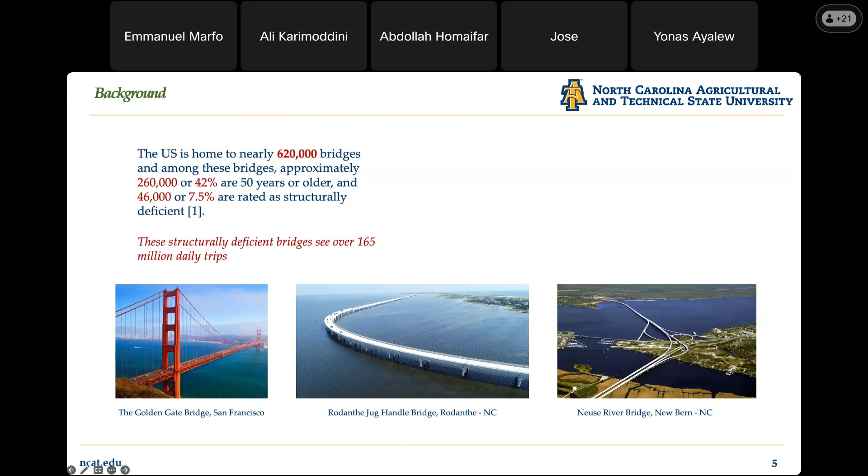So about the background, a little bit of history about bridges in the US. Currently, as per the ARTBA data, the US houses almost 620,000 bridges. And these bridges, some are very old, mostly dating back 70 or 80 years. As known, bridges, since they are all structural elements or structural systems, require consistent and recurrent inspections and rehabilitation.

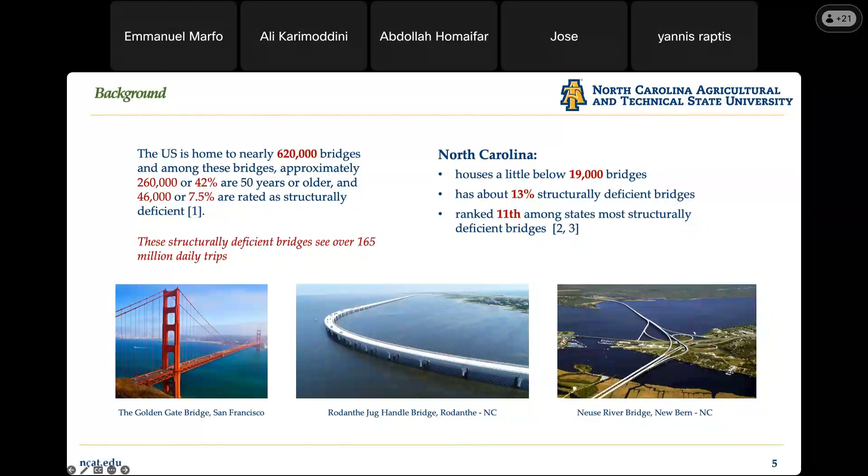To narrow down to North Carolina, the state houses almost 19,000 bridges. In these particular numbers, there is a structural rating which is mostly assigned by the National Bridge Authority and the Federal Highway Administration. North Carolina has 13% of these bridges as defective, which is way above the national threshold for defective bridges in a particular state. As such, they need to consistently conduct inspection, and bridge repairs are always on the rise.

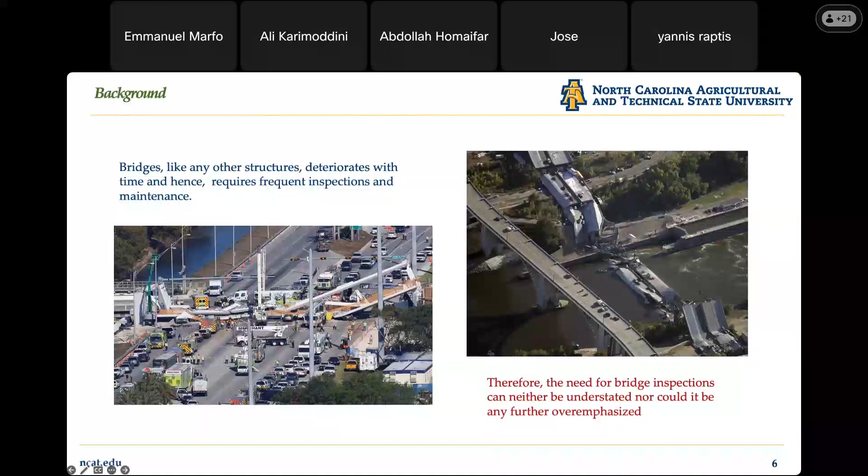As such, bridge inspections are very important in the US, and the Federal Highway Administration has defined a number of inspection approaches or sequences that need to be done. With regards to inspection types, there are generally 7 inspection categories defined by the Federal Highway Administration. Based on the structural makeup, its complexity, the traffic on it, and its location, a particular inspection approach or pattern may be chosen.

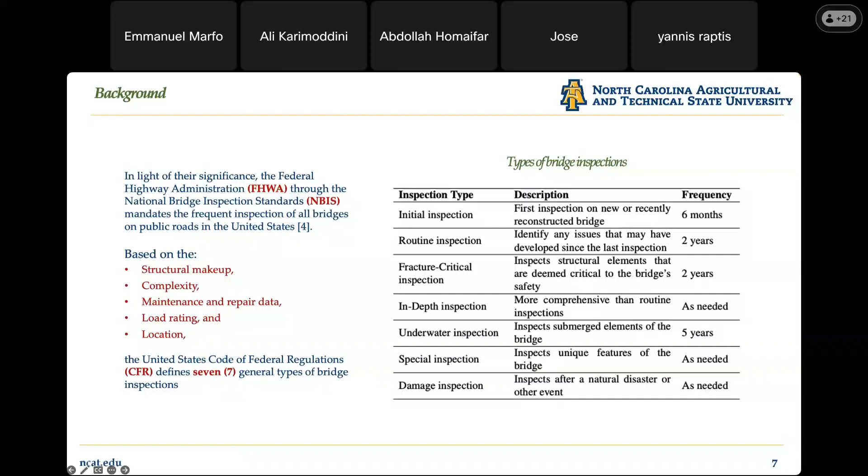In all these inspection activities, the traditional approach has downsides. To mention a few, it's proven over time to be very costly and very time consuming. Looking at the highway estimation for the biannual expenditure on bridge inspection, it's almost $2.7 billion, which is high looking at the budget set.

Aside the cost and time challenge, there's also safety risk that is constantly increasing with regards to bridge complexity increasing. Now bridges are more complex, and as such their height, weight, and load ratings are also high. Assessing the individual and distinct components exposes inspectors to several risks and hazards, such as working at height, or using trucks which are not stable on bridges with low load ratings, leading to collapse during inspections. Also, since inspections are not streamlined, it always leads to subjectivity and variability in the results, depending on each person and how he or she sees the results being populated.

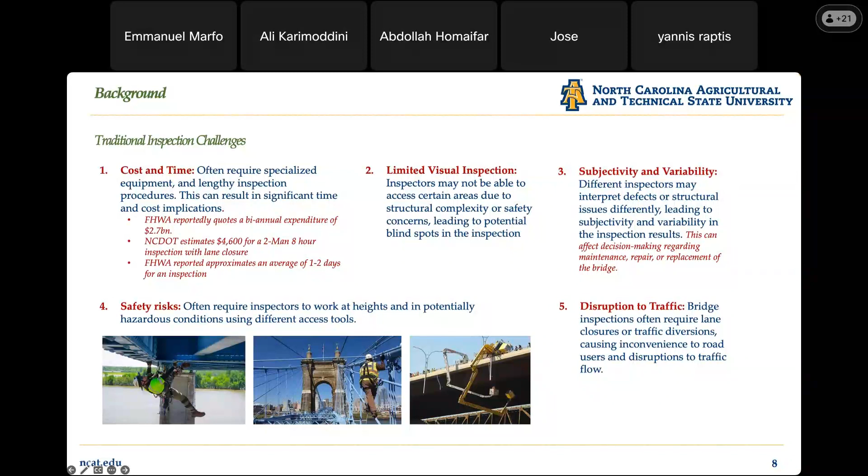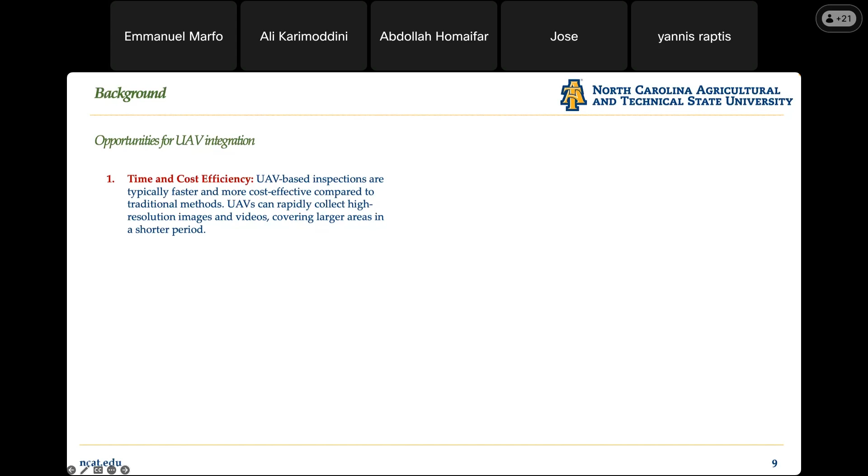As such, the need to define an inspection system which will solve these problems increased. There's been research on how to take advantage of emerging technologies like UAVs and other remote sensing technologies to help solve these problems. So in this work, using UAVs, we hope to reduce the time and cost challenge or make them more efficient by integrating UAVs.

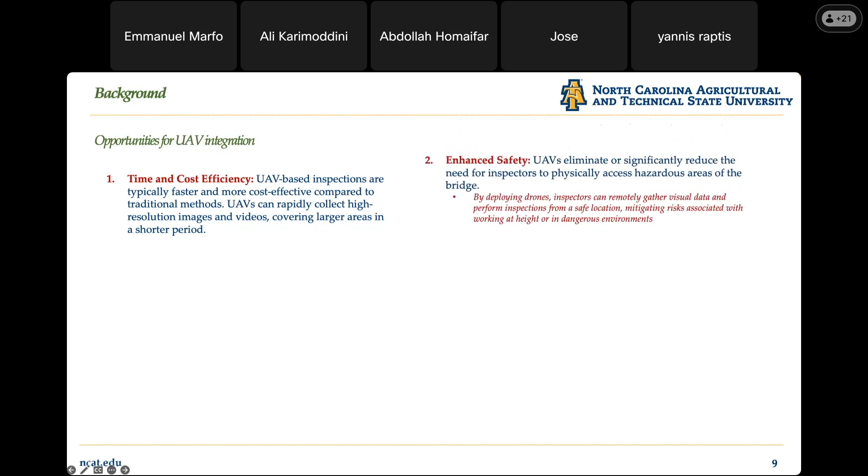Also, we hope to enhance the security and safety, that is, reduce the level at which inspectors work at height or work in confined spaces.

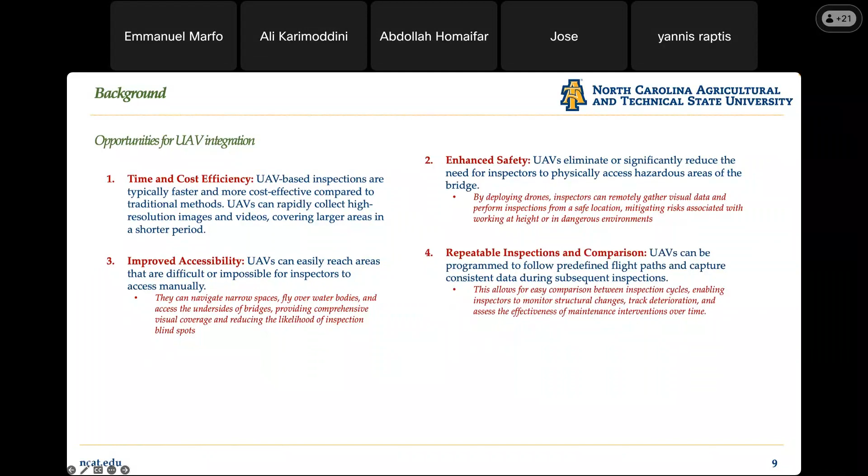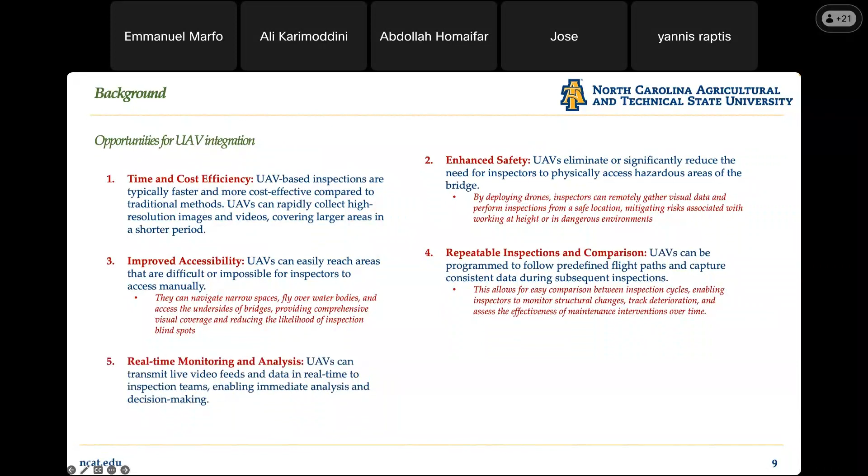By using UAVs, we are also hoping to increase accessibility to some distinct aspects of the bridges. We have to create an ecosystem where we can repeatedly achieve the same results, even if done by different people with different inspection skills and knowledge. We also need to make it faster, so we need an enhanced real-time system that can monitor, analyze, and report findings to bridge stakeholders and owners.

Jumping to the focus, to solve these issues we need to hit on some particular points. The first is the restrictions imposed on UAV integration and usage by the FAA, the commonest being airspace class. There are class distinctions for which UAVs may or may not fly in the US, so it's prudent the inspection team and researchers go over the restrictions and apply for waivers if possible to conduct an experiment.

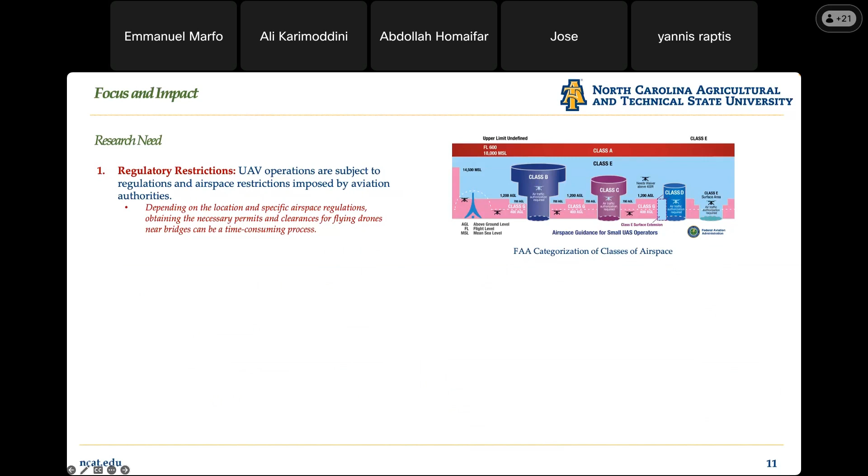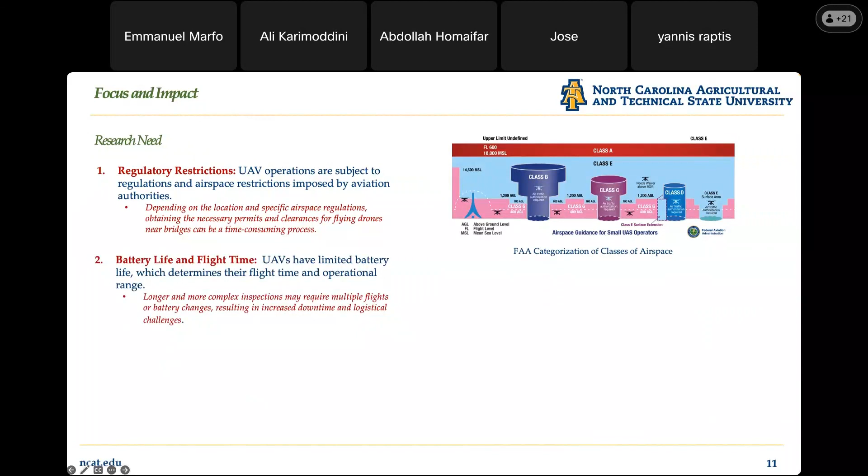Also, there's a need to analyze battery life and flight time. UAVs have limited batteries, so we need to understand the integration process, what it comes with, and what to make available to avoid failure or drawbacks. We also need a system to help interpret the data we collect, whether in real time or post-inspection, to reduce variability and different validations based on different knowledge and skills from different personnel.

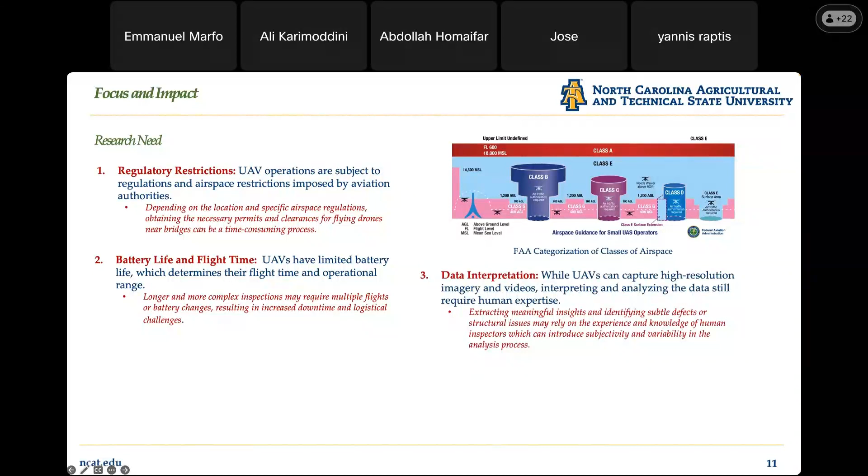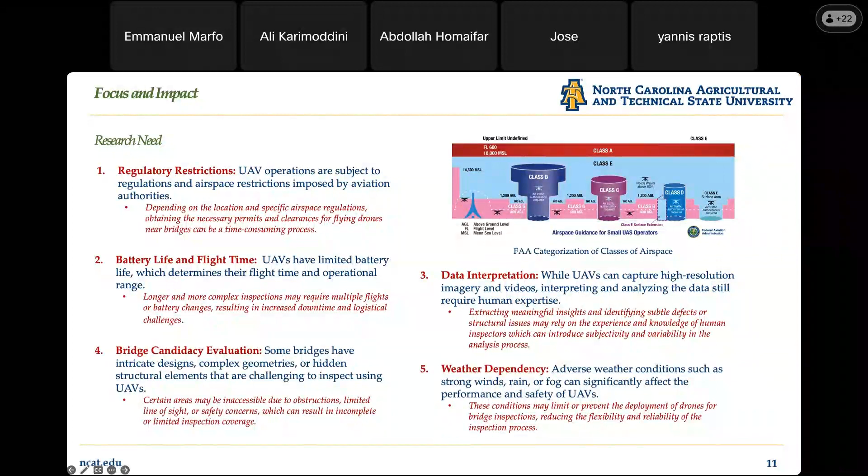Since not all bridges may qualify for UAV integration, we need to develop a system that will help us evaluate a particular bridge to see if it fits for UAV integration, and a system that will help detect ahead of time if the weather schedule is appropriate.

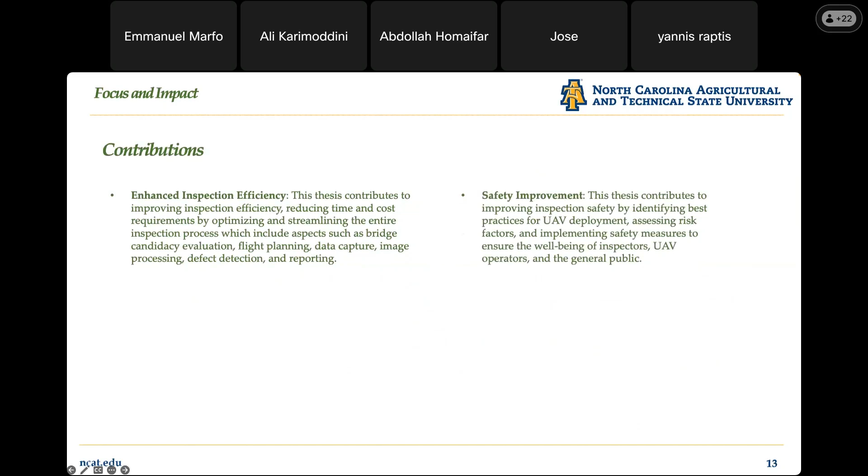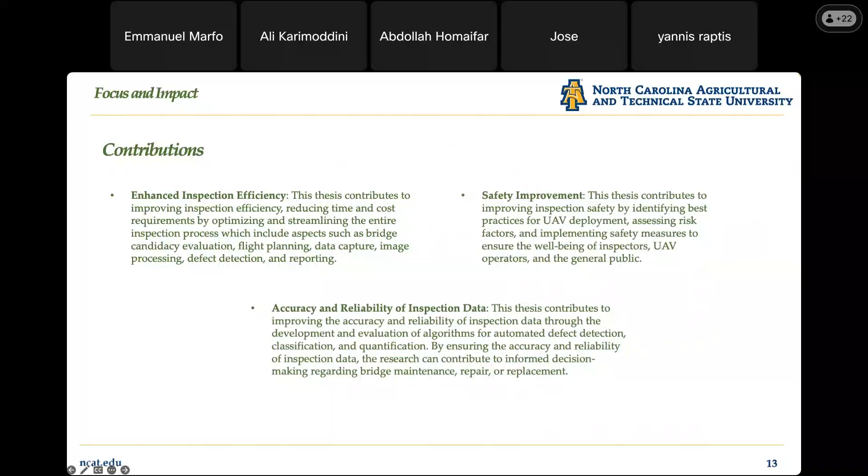In the end, we hope to achieve three main goals: enhance inspection efficiency, cost and time; improve the safety aspect by reducing risk and increasing accessibility; and make our results more reliable and more repeatable.

So in our work, in accordance with the current inspection process, bridge inspections are categorized into three main stages: the pre-inspection, which houses in-office activities and on-site evaluations; the actual field activities involving data collection and analysis, with real-time implementation if in place; and the post-inspection phase, involving detailed data analytics, report generation, and stakeholder meetings.

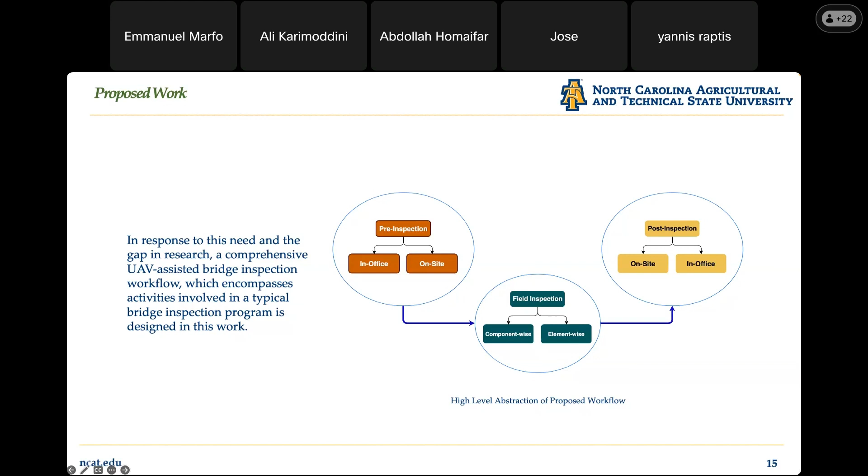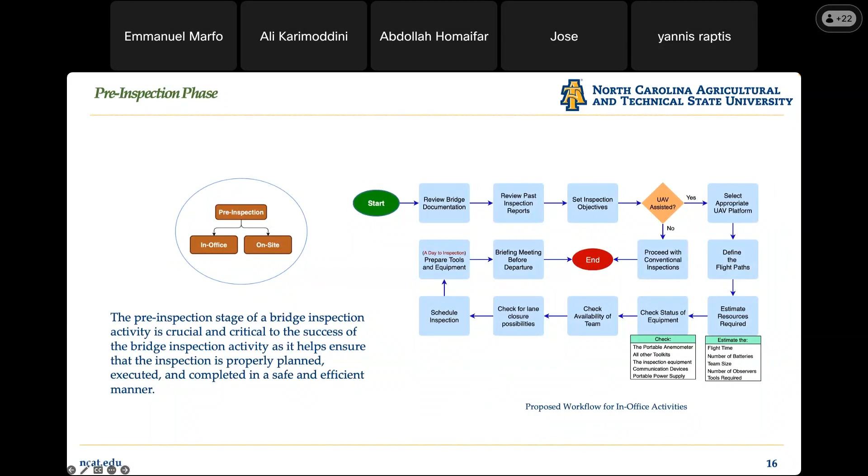To start with the inspection process in the office, we try to go by the traditional approach, not to introduce a huge difference in practice from the get-go. This workflow is in line with traditional practice: first, the stakeholders or inspection team evaluate the documentation, getting to know the bridge history regarding maintenance data and what needs to be done or has been done earlier. Then in the next stage, we kickstart the UAV integration.

At this point we do the bridge candidacy evaluation, to see if the bridge fits for UAV inspection. We shortlisted key metrics to focus on, particularly the bridge size, height, or complexity, since some bridges are short enough to not warrant UAV integration, along with accessibility, location, cost effectiveness, and looking at the previous inspection report for how much was spent and how much time was spent.

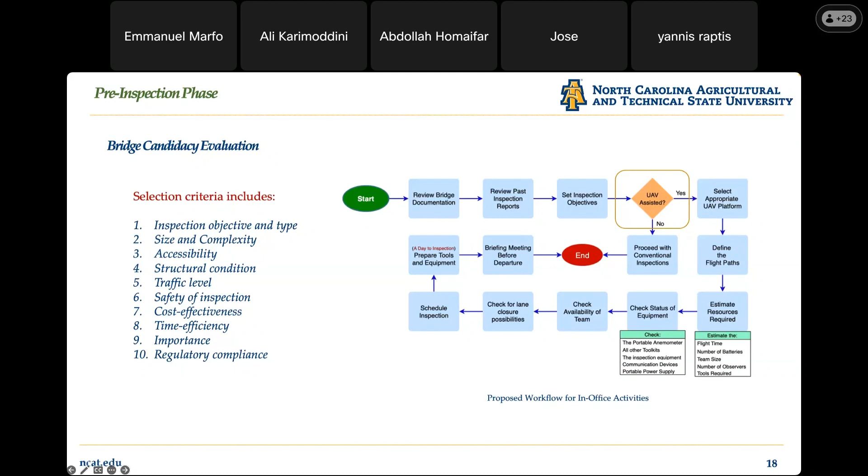If all these criteria are assigned higher scores, the final score from the candidacy evaluation table will inform stakeholders on the approach, either UAV integration or the traditional approach which has always been the practice. In the end, this table will be designed in a UI form integrable into the current system used by NCDOT, called Wiggins, so that in real time they can do this analysis together with office planning to know what to go by during the actual inspection phase.

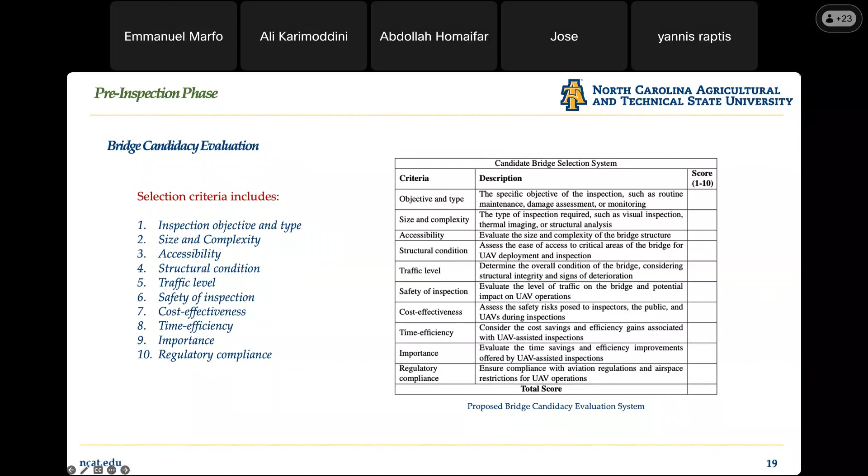After being able to evaluate the bridge candidacy, we can now proceed to selecting the platform. Knowing the bridge we are working on and the objectives for the inspection will best advise on the platform to use, so this stage will be dealt with as a result of what is obtained in the previous phase.

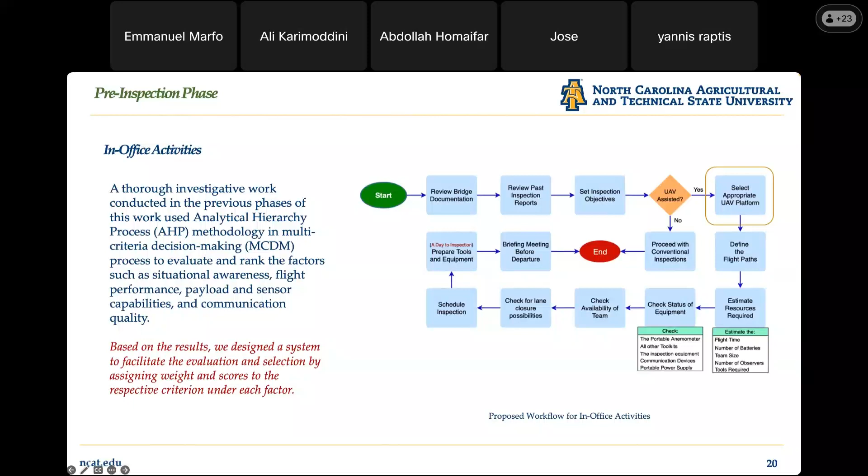In the previous phase of the research, the team developed a template that will be used to evaluate several platforms to understand which one to use for a particular bridge inspection activity.

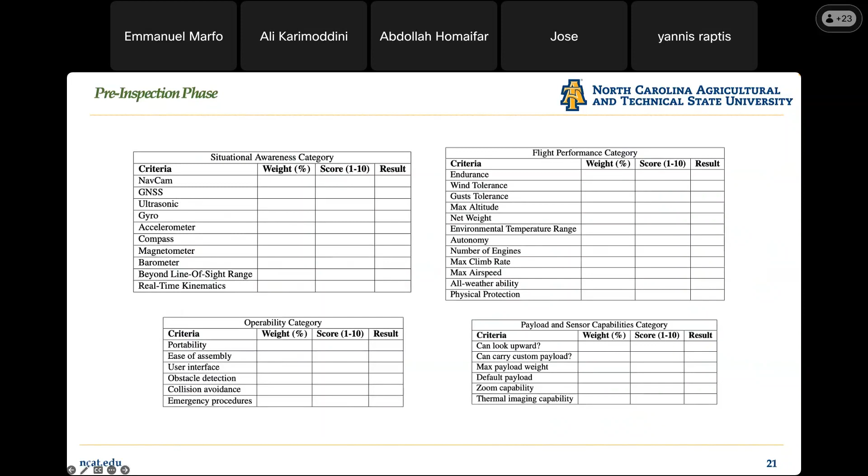After selecting the bridge and the particular platform to use for the inspection, it's now time for us to plan the inspection properly.

In the planning phase, you have to understand the expected time the inspection will span, and the number of resources needed: the team, the batteries, and standby resources to make the inspection happen smoothly. In our work, we defined a flight path or flight sequence which, after conducting several experiments, we realized was best to use.

In that experiment, we defined 4 different flight paths. The first is the vertical: a top-to-down or down-to-top flight over the vertical elements in the bridge, particularly the piers, the columns, the bents, and the pillars, just to name a few.

After this, we defined a longitudinal flight, which in our definition travels along the x-axis for a regular 3D element, if you make the bridge a 3D element. In a typical bridge structure, this flies along the girders, the beams, or the rails, the actual railroad. That is the longitudinal section.

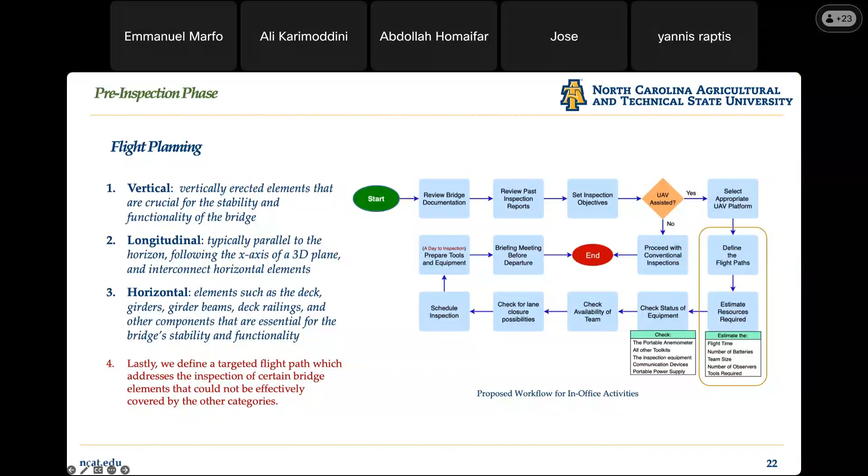After defining the preferred flight path for the inspection, it's wise to estimate the time used in this flight, or the total inspection approach. In our approach to estimating the time required, we first defined static paths for our bridge elements.

As said earlier, the pile or the bent, the columns, and the pillars are the vertical elements. The pier cap and the girder beams or grade beams are the horizontal elements, and longitudinal elements are the girders themselves or the deck road themselves.

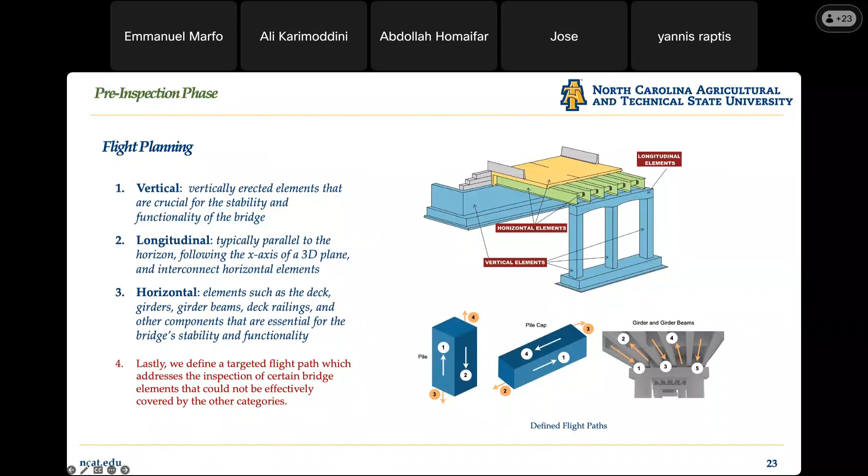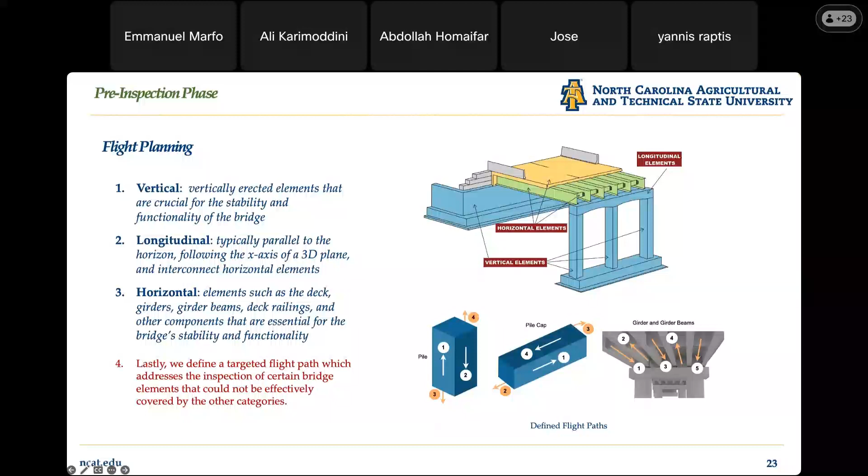After these definitions, we first did an experiment to understand the skill level of a pilot employed to fly the drones or conduct the inspection. In that experiment, we defined 3 flight categories: a basic pilot, a professional, and an intermediate pilot.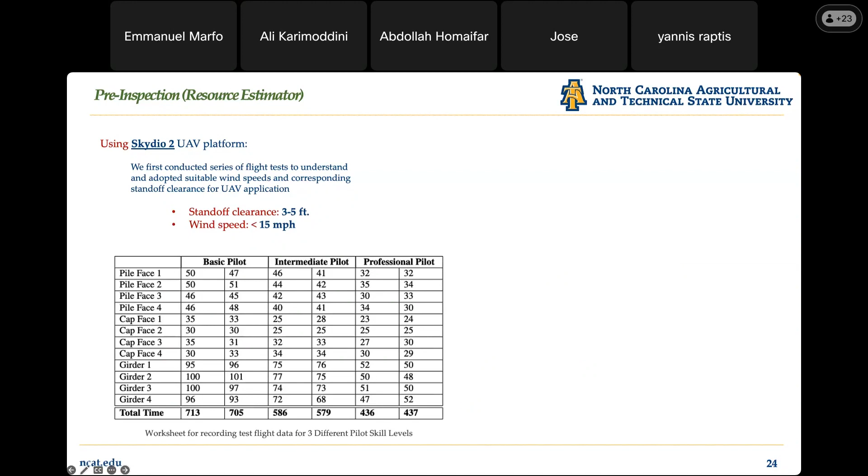We had a series of flight experiments with these separate pilots to understand the timing or time sequence they go through in successfully inspecting elements or the whole bridge. After these phases, we were able to calculate the required speed or speed ranges for which a particular pilot skill level can fly the drones and give us an optimal output for analysis.

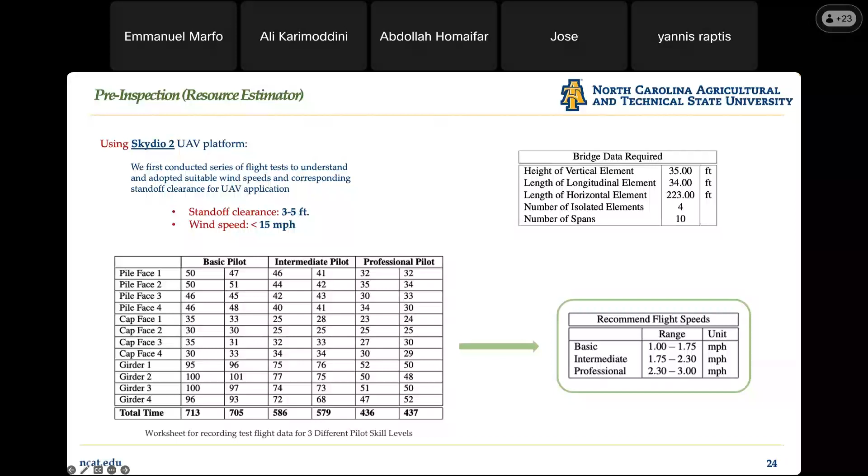As shown in the green box table, we're able to define the ranges for the pilot skill levels. Having defined these ranges, we now use one pilot skill level to estimate the time it will take to conduct a bridge inspection.

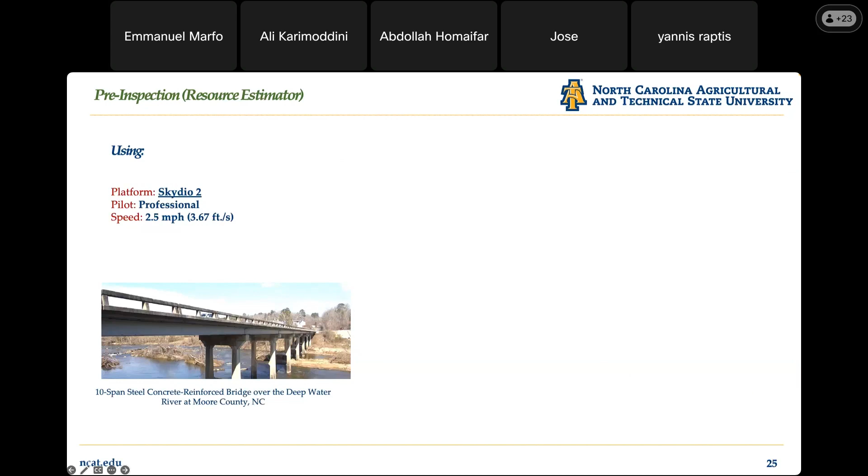Using this bridge, which has 10 spans and each span almost 66 foot long in regards to length, we're able to design a tool that estimates the inspection time.

As shown here, using this bridge and the dimensions given in the previous slide, with a pilot at the professional skill level and setting the speed to 2.5 mph, it was estimated that the pilot would take nearly 2.5 hours to conduct the full inspection.

This estimation includes a 30% margin of error, which can be attributed to differences in wind speed at that time, or weather causing several break and resume sequences in the inspection.

And having known the inspection time, we can quickly compute the resources we need with regards to batteries. Since each drone battery lasts, let's say, 30 or 25 minutes, the manufacturer stipulations there are with regards to room temperature. So in our estimation, we assume that 85% of the battery can be used.

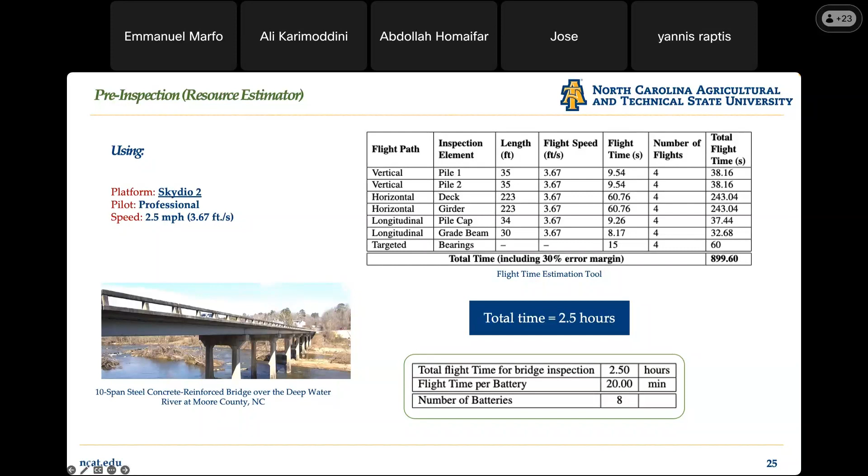So all these insights will be modeled in the general workflow that will be transferred from the research phase to the implementation phase for the inspection team to apply. After these estimations, we can now jump to preparing for the inspection, which is almost similar to what they do in their traditional sequence: gather all the items, make sure all team members are informed on the date and scheduling, and everything is gathered before the day of inspection.

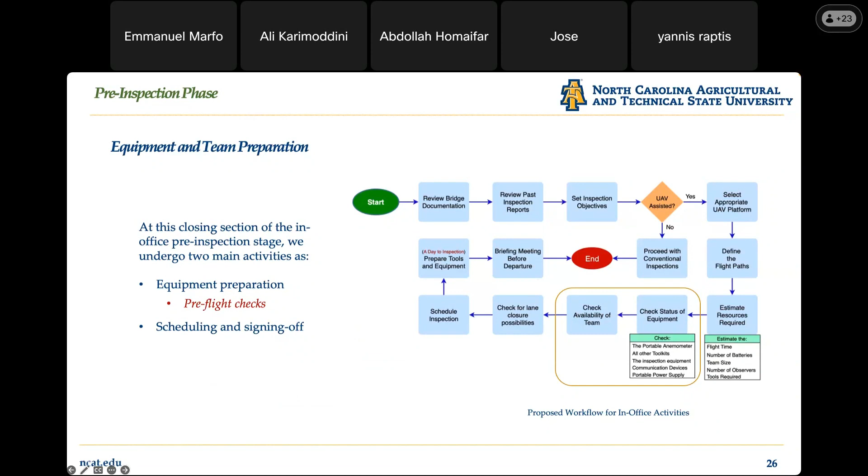And since we are transferring the technology from the research labs to the field, we have to make it easy for the inspectors to understand how to go about using these drones and frequently servicing and updating them. So we designed a simple flow which applies to almost all drones that we have in our lab.

This design was added because of some incidents we faced. There were happenings where the team got to the inspection site and realized the drone actually required an update. As such, we were not able to fly the drone. You have to drive back hours to the office just to update the drone.

Or you have to drive back to a site where there's internet. Most bridges are at remote places where there are no or weak internet signals, so you have to drive back to get a better signal to update it, which all adds up to the inspection time and literally to inspection cost. So we added this to ensure that the inspection team conducts all these activities to optimize their in-field inspection time.

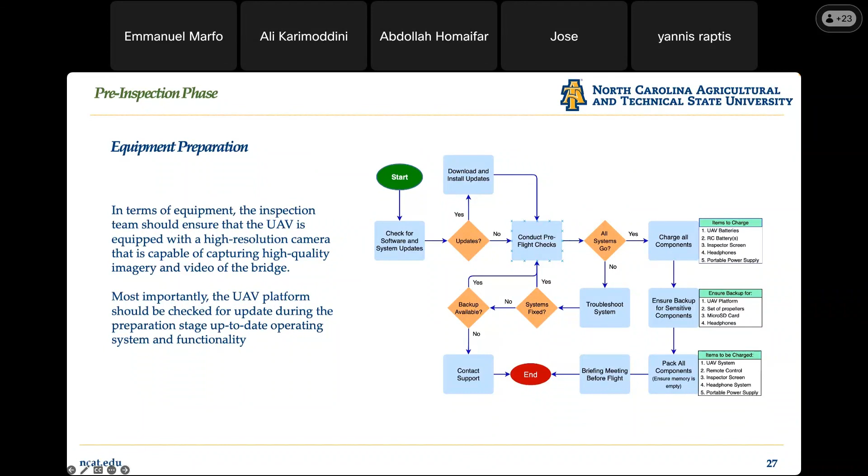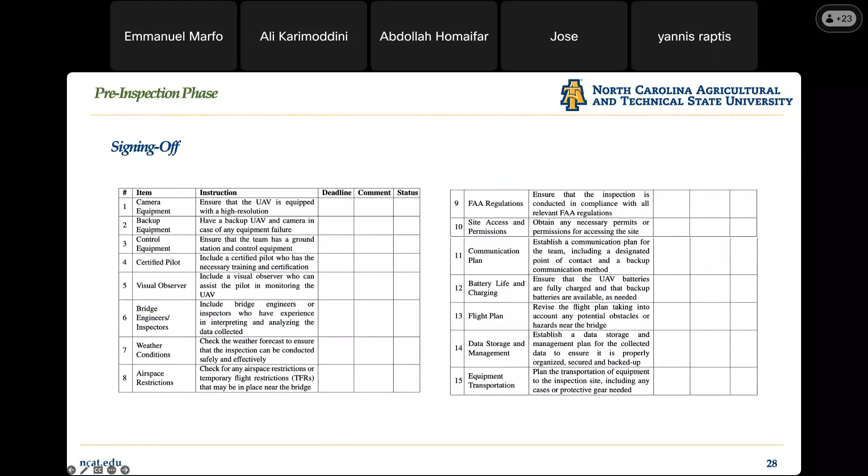And in the final stage, after the in-office activities, we just sign off by having this UI or software, which will let them check off whatever item is needed for the inspection to be done.

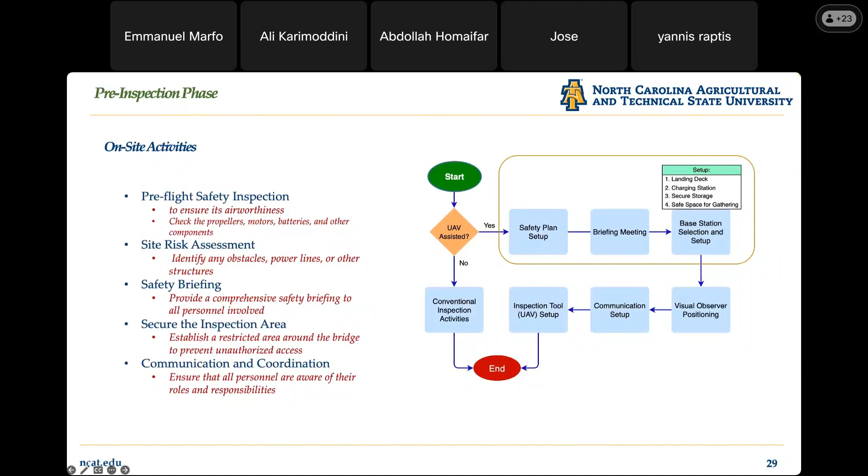At the site, there are some basic things to be done: check the safety plan, have a briefing with the team, and in the next stage, there is a mandate from the FAA which says that for any UAV outdoor inspection or flight, there's supposed to be a visual observer who at any point in time keeps eyes on the drone and communicates with the pilot as to incoming traffic or any danger ahead.

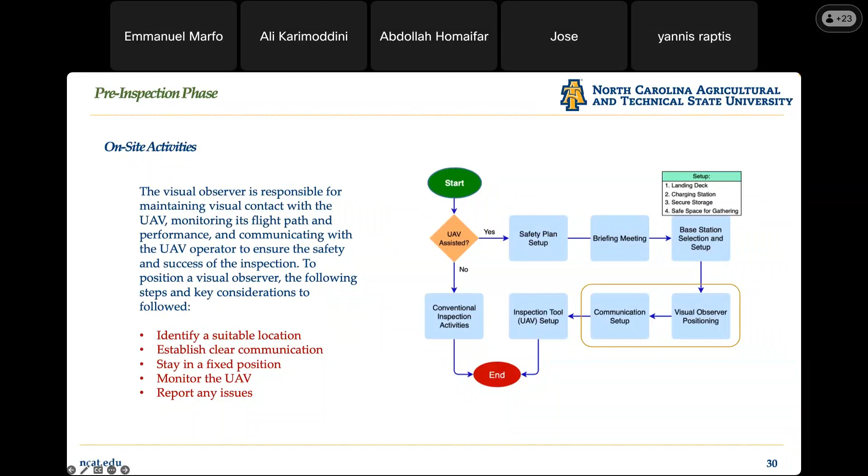So it is wise that the team set aside special people who will act as observers. And to optimize the team size, it is best the team decides that among the members, people multitask so as not to introduce any extra team member just for the job of observer. So all these are handled in the pre-inspection phase before the actual inspection is started.

And in the field inspection, currently in our work, we limited our resources to only RGB-based UAVs. There are several sensor technologies, thermal and among the rest, but we use only RGB cameras for this phase. And in using RGBs, we define 3 approaches to conducting the inspection.

The first can be collect overlapping images, which are basically videos, and then we can run the videos through an optimized or developed algorithm, which will help us analyze the respective displacements that are recorded in the video, or collect multiple images with a high overlap to avoid missing any damage or defects.

Then we can run an algorithm on it to draw contours or bounding boxes around the respective defects detected. And the third is to employ 3D reconstruction, where the bridge can be modeled as a digital twin, and then on a digital twin, you can now augment the respective defects on it.

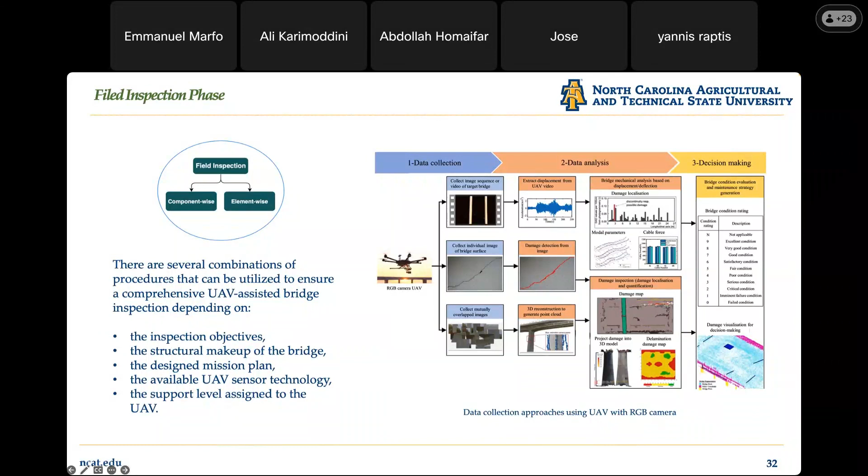Going by these workflows, this is applicable after we check all the systems and get to the 3D modeling part. We just pop up a question for the user or the pilot.

If we are not employing 3D reconstruction, we can jump straight to inspection. In the event that we are employing 3D reconstruction, we have to kickstart the 3D modeling phase, which will remodel the bridge. If the model is not already available, we have to build it by collecting overlapping images first.

But if there is already a 3D model built for the bridge, you can go straight to inspecting and then augmenting or filling in the respective defects with the current state of the bridge.

During the inspection process, if there is a real-time system established which can communicate defects in real time, be it with bounding box or contours, the system will be kickstarted. If not, we collect the necessary images or videos and save them for post-inspection activities.

In our work, to have a real-time system established, due to how heavy the deep neural network systems are, we sought to quantize or compress our models so they can be used on edge devices. There are several ways to do that.

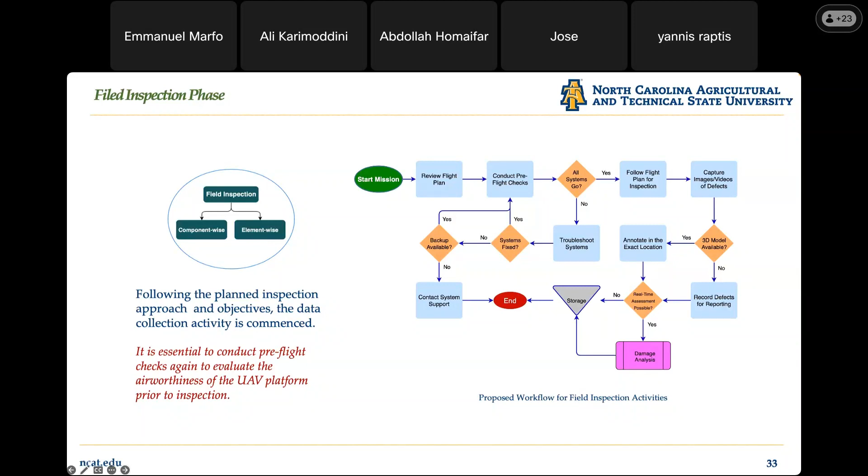But this is a UAV assisted inspection, it's not overtaking the entire inspection approach. So the inspector validates the output from the UAV before it is saved or assumed as valid.

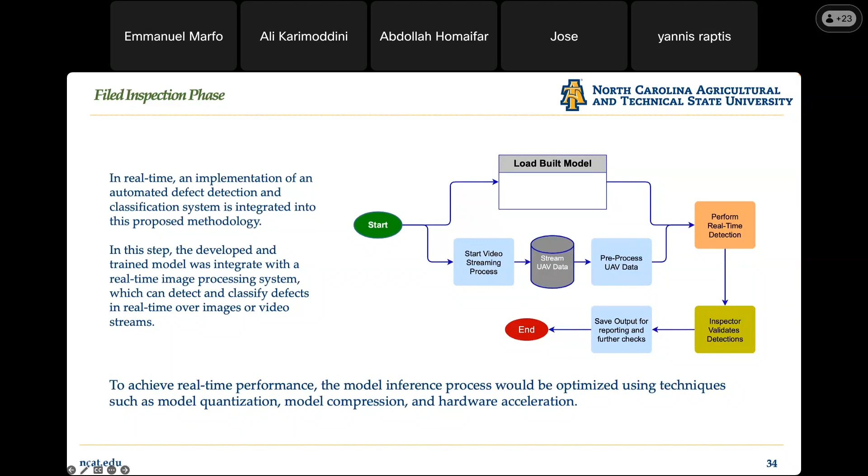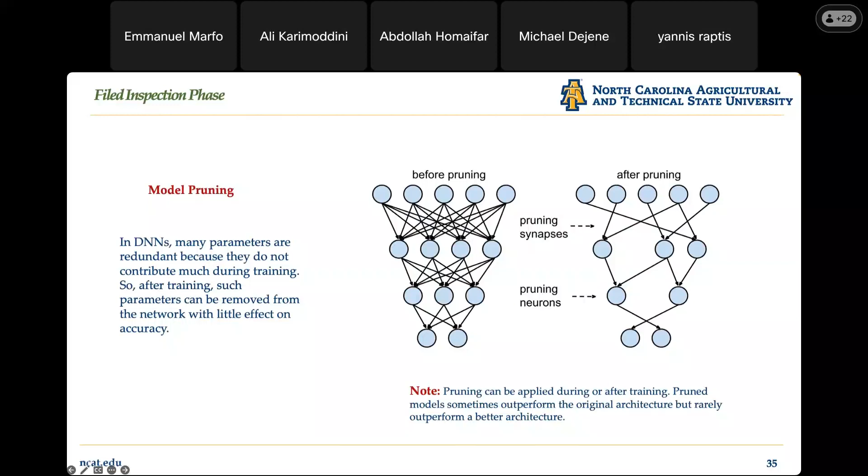To achieve the real-time effect, we try to use the model pruning approach. Pruning, as I mentioned, is just to reduce the number of connections and neurons in the entire system, to arrive at a compressed model with smaller size but equal performance as the parent model.

In the event that real-time inspection cannot be started, the data collected can be analyzed in the post-inspection phase. Also, after real-time inspection has been done, the data can still be analyzed intensively in the post-inspection phase.

In this phase, we design a simple workflow to guide it. Depending on the data type that was recorded, we pass it through the appropriate processing models or algorithms. For 3D reconstruction, we pass them through point cloud processing. For video and images, they go through visual analysis algorithms.

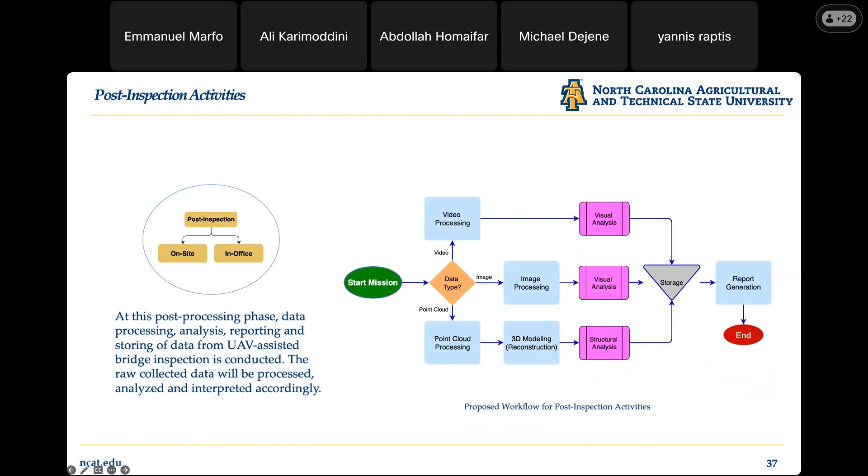In our data processing, we first use the respective image processing techniques to put our images in the best shape before they are passed to the algorithms, as has been the practice for computer vision and all these image processing techniques.

And afterwards, we do our analytics. As mentioned, this work was mostly focused on images and videos. We didn't consider point cloud that much, so the section for structural analysis is not dealt with in this phase.

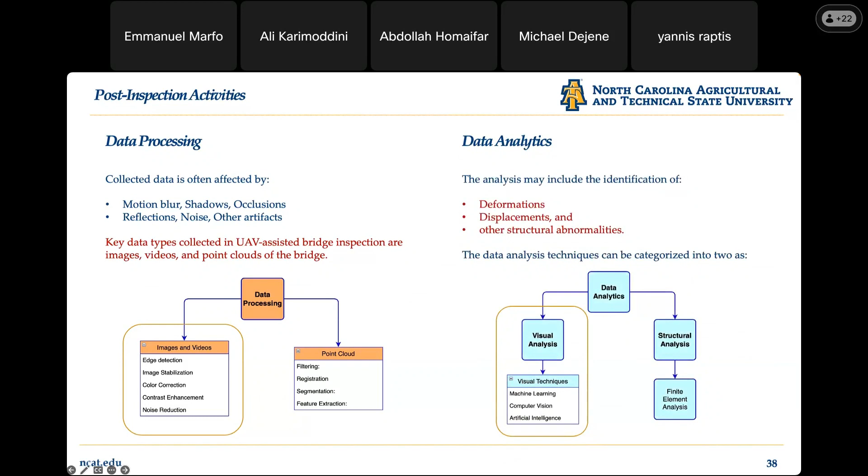In the visual inspection section, we use machine learning algorithms coupled with computer vision techniques and AI to achieve our output. In the first work, we considered an instance where the visible defects on the bridge are just cracks, only cracks. So in that, you have a set with cracks and no cracks.

This is the sequence in which the algorithm was developed for conducting the data analytics. We first pass the images through an image processing technique to filter or put it in the best shape. The algorithm will now detect and classify the cracks, and then you can quantify it if possible.

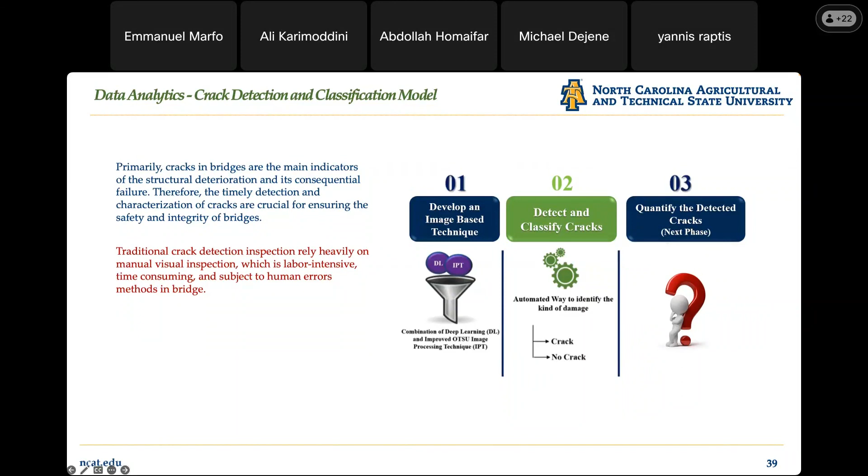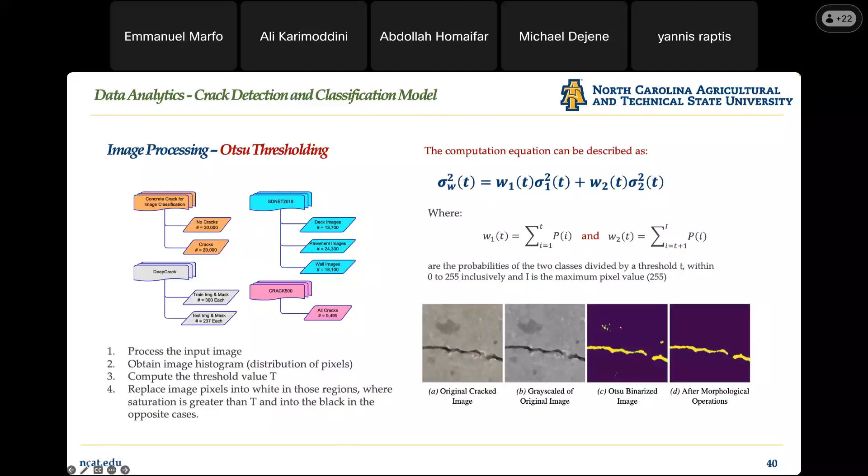So a sample of images that were used in model construction are shown. In the processing stage, we first use Otsu to binarize the images. There are several ways to binarize them, but we use Otsu to do the binarization. After the Otsu implementation, the sequences that it goes through are shown in the images here. The final image after morphological operations is the fourth one to the right.

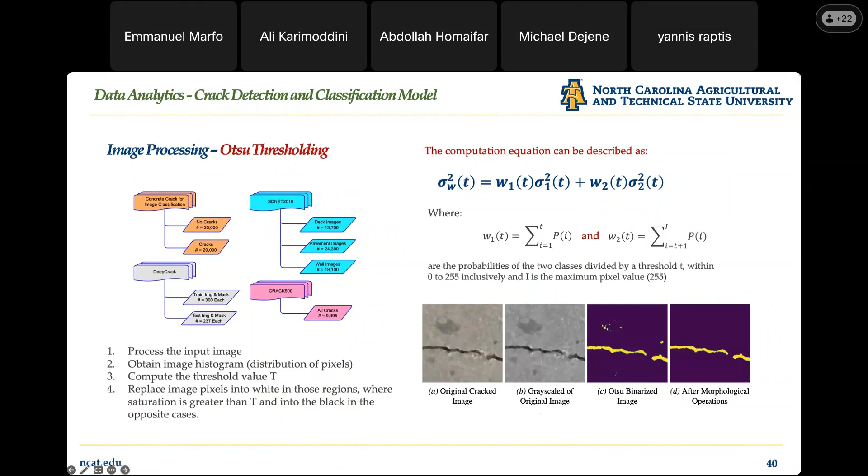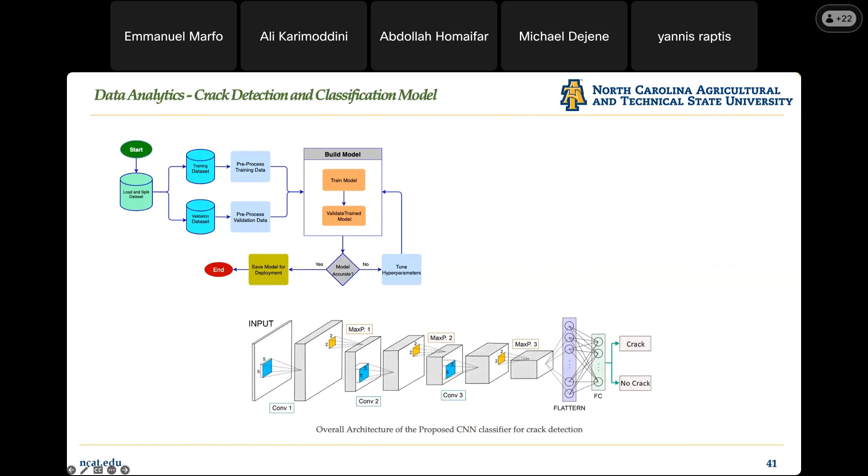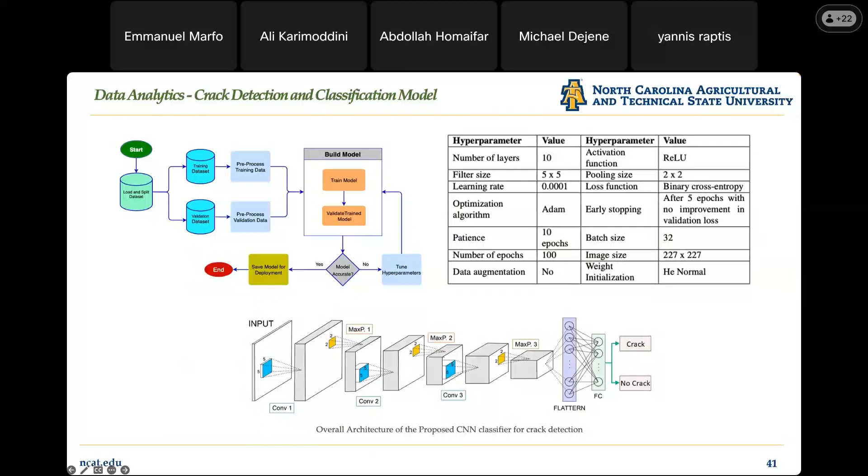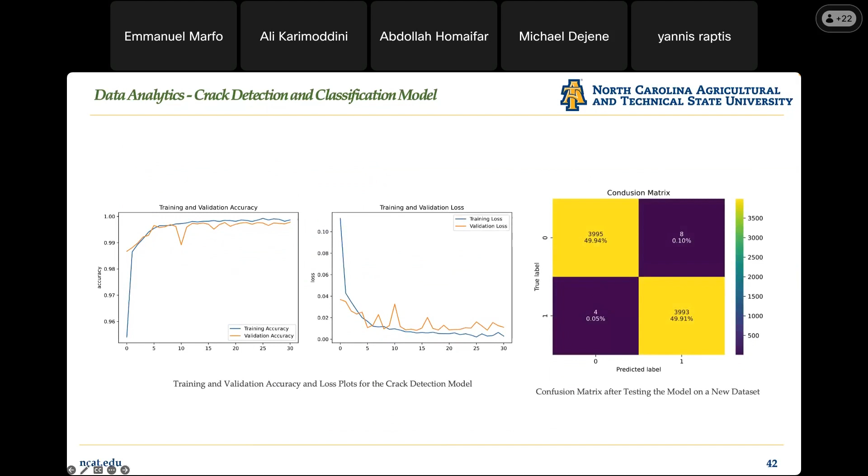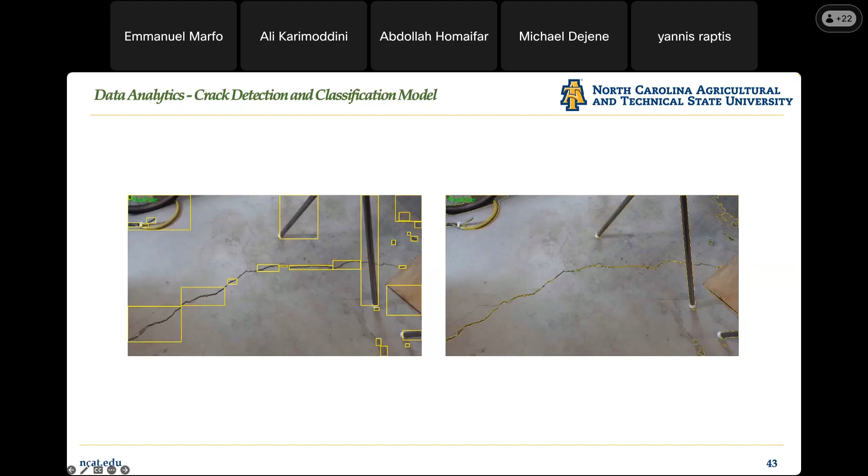Afterwards, we did the real-time implementation on a surface where we have two ways: either we use contours to select or pinpoint the defects, or we use bounding boxes to do the same thing. After dealing with cracks, it was realized that there are several types of defects on bridges, not only cracks. As such, we had to remodel the system to help us solve the issue of identifying which type of defect this is.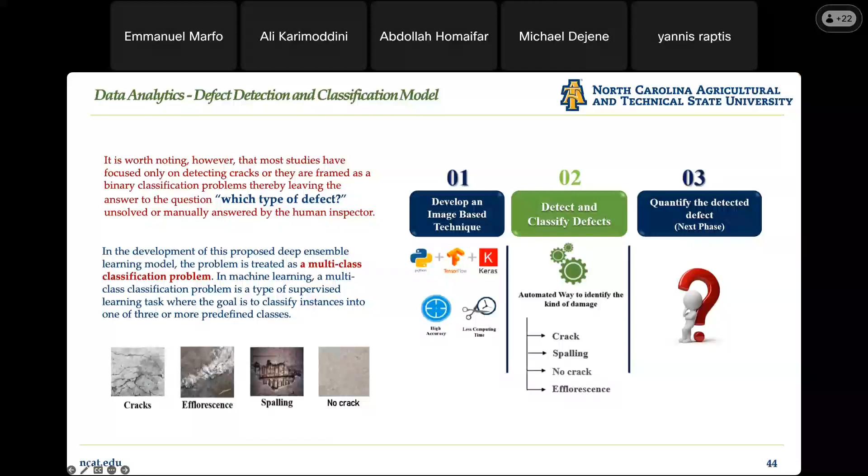To start with, in our dataset, we had a limited number of images. So we defined an algorithm which did these operations on the respective images to result in a balanced set with 3,000 images each in all the respective classes. After this image augmentation phase...

We employed transfer learning, where knowledge acquired from datasets which are large in number is borrowed. Then based on that knowledge, we develop or fine-tune our model to achieve a final model which is optimized enough to handle our task.

In our work, we use ensemble learning also, to aggregate the predictions from multiple models or multiple fine-tuned models to result in a single model which can handle almost all cases with regards to the types of defects we are dealing with. So we chose these 5 architectures based on their diversity and their difference in implementation and construction.

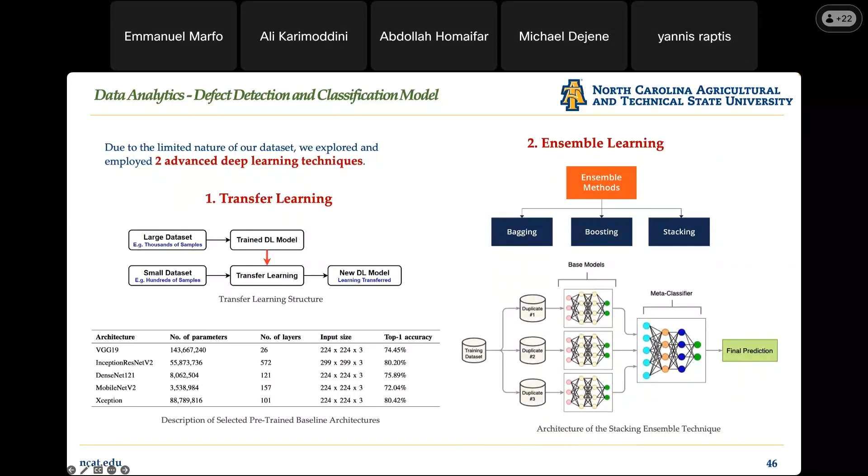After the ensemble approach - earlier in ensemble, too, there are several ways, but the 3 common ensemble techniques are bagging, boosting, and stacking. Bagging is mostly used for regression runs, and stacking is mostly used for classification. So in our work, we use the stacking approach.

The idea of stacking is you run separate models on the same dataset, and you can either stack their outputs as one, or you can stack the models first as one, and then pass the final output to a meta classifier, which tries to understand the basis upon which the respective models make their predictions, and then makes a final prediction from those inputs.

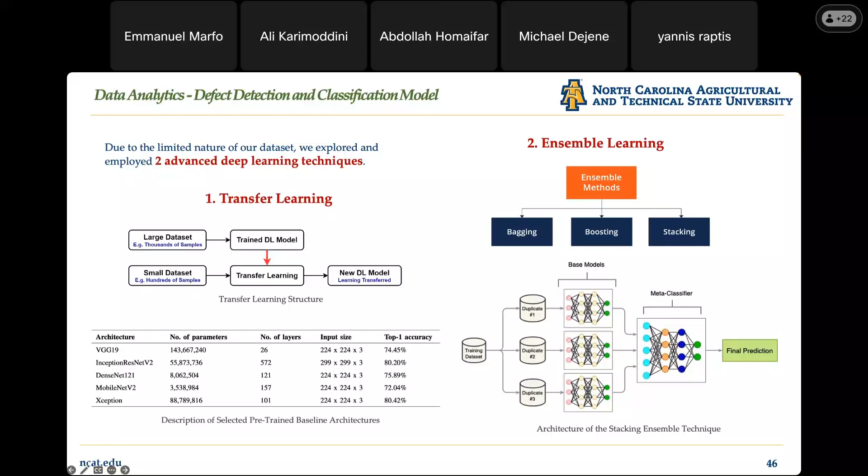So in our stacking ensemble model, this was the sequence we went through, and this was the structure of the neural network that we used. In evaluating our system, we chose these 4 metrics for the evaluation.

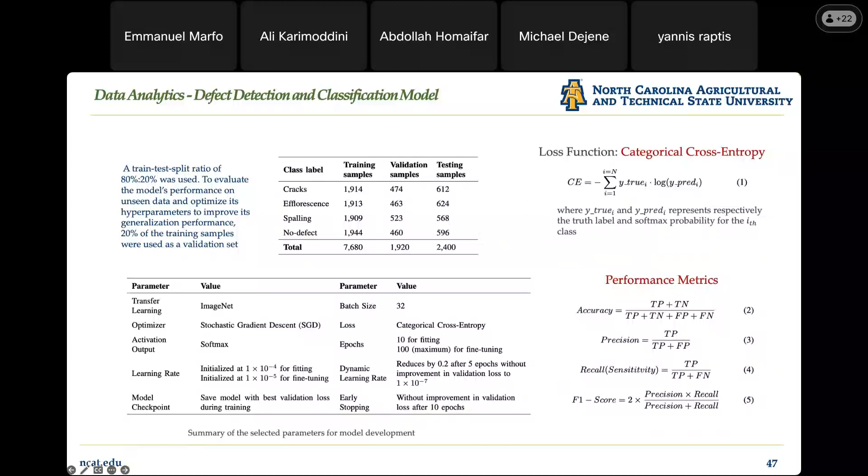After training and running the model several times and fine-tuning it, we had these results from the respective base models that we chose for the ensemble model. As can be seen, VGG19 eventually emerged as the best model for handling the dataset we had. The same was true for the DenseNet model, followed by the Xception model.

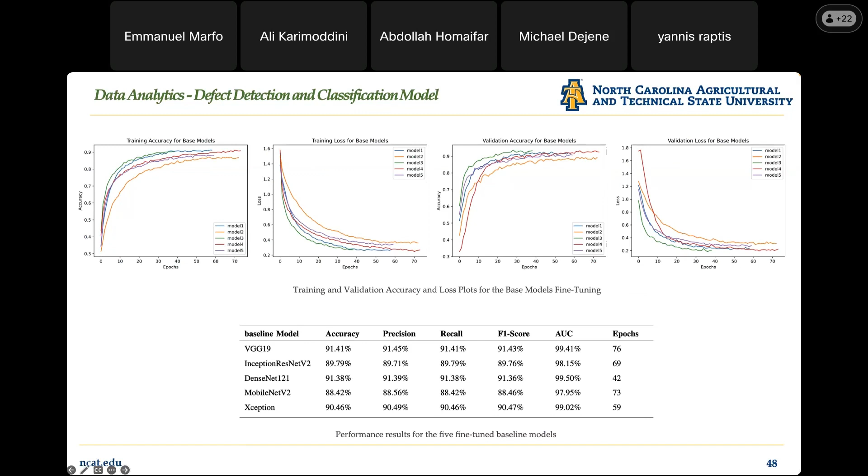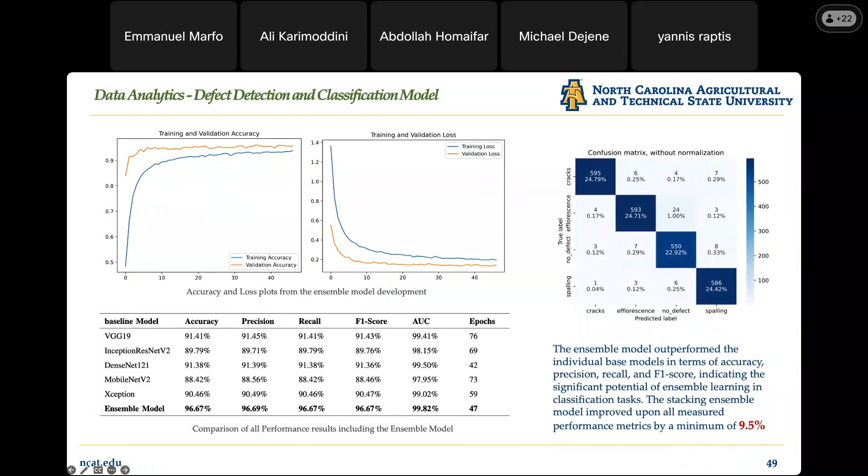Afterwards, we did the ensemble aggregation, and the final ensemble model proved to be best among the models we had in the final implementation. So compared to the 5 base models, the ensemble was able to aggregate the respective predictions and achieve a higher accuracy or higher metrics than the individual base models.

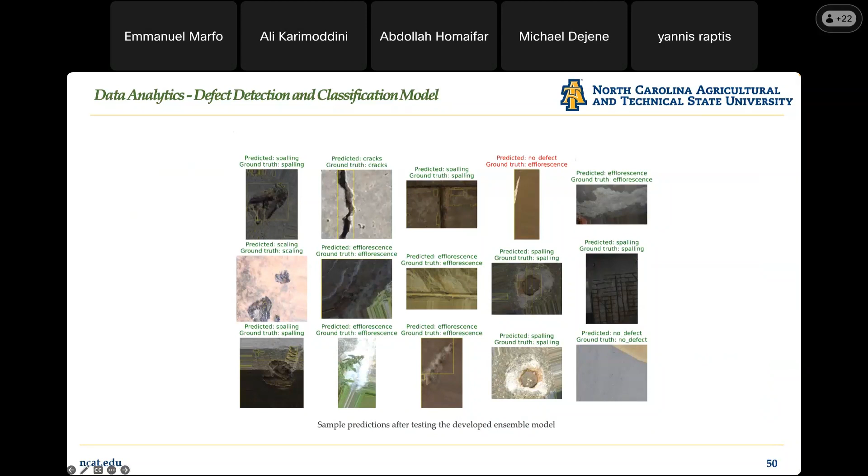Afterwards, we did a regular run on a sample set of images containing 200 images of 4 classes of defects, and it was able to classify the respective defects into their appropriate classes, as can be seen in the image here.

So to end our work, we were able to identify the challenges associated with bridge inspections. We were able to take opportunity of the defect challenges and capitalize on that by integrating UAVs. We developed a workflow that will guide the transfer of technology from the research labs to the field, and provided systems that can estimate or predict the inspection sequence and timing, for us to have a better view of what to expect and what not to expect.

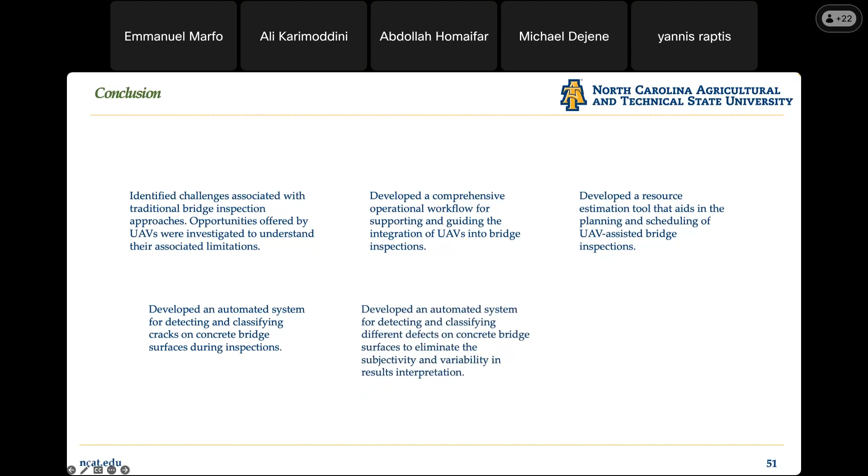We're also able to provide algorithms or systems that can help us achieve repeatability and reduce the variability in explaining the inspection results. And we're also able to provide a system that can, in real time, enhance the inspection approach by assisting the inspectors with what to expect, what not to expect.

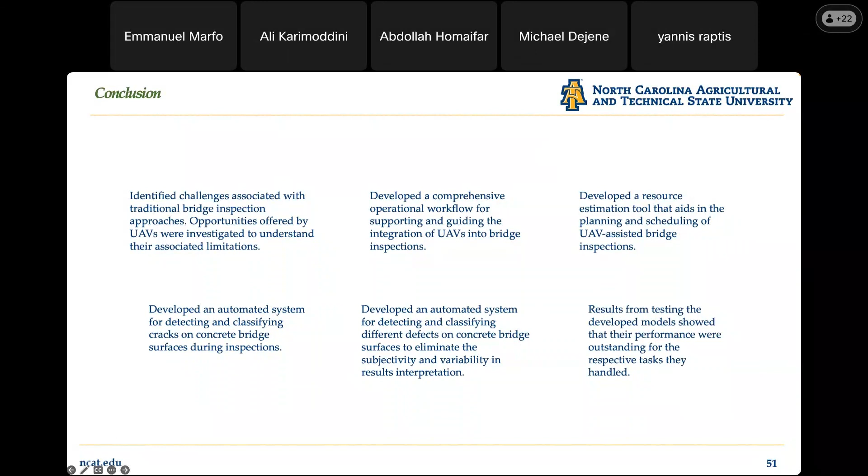Everything achieved in this work is limited to the data set we had from the onset. So having these models there, they can be repeated, varied, or optimized by using different data sets or making them more improved or advanced.

Also, this work did not really talk about the cost benefit, because that session will be covered in the next phases if conducted, to understand the cost and timing benefits by striking a comparison between UAV integration results and traditional inspection results.

We can also make this workflow and these softwares more user-friendly by implementing them in various commonly used software or software languages. Lastly, you can improve the model accuracy and its entire metrics by incorporating richer and more diverse images, and even increasing the number of classes, since there are several defects in real applications. This makes the work more applicable and practicable by making the number of classes more diverse and increased.

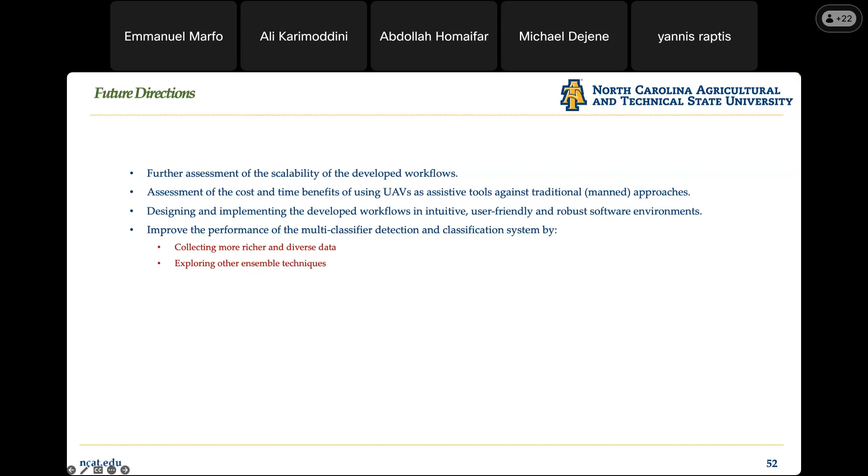So this is what we worked on for the 2 years in the lab on the UAV integration. If there's any question, I'm available to take them. Thank you.

Great, thank you so much. So, any question to Emmanuel? By the way, congratulations, Emmanuel. Just today at noon, you got the acceptance letter for the TRB conference. That's great.

Yeah, I do have one question. Can you hear me? Yes. Okay, thank you, Emmanuel. Good presentation, you have done a lot of work. One quick question that's very simple.

Is there any advantage of using thresholding at the pre-processing steps before the training, or can we simply take the data and directly feed it to the neural network? Would that also work?

Yes, there is not much of an advantage in binarizing the images first, but some applications would do great if you binarize first, but not always. It's not always the case. In our work, we tested a system which took only the images in color sequence, but most of these algorithms do best when the images are grayscaled. And in grayscaling, it's good to binarize it properly. That's why we use Otsu's method. But there is also a system we have which takes in the RGB images straight and provides almost the same or similar outputs.